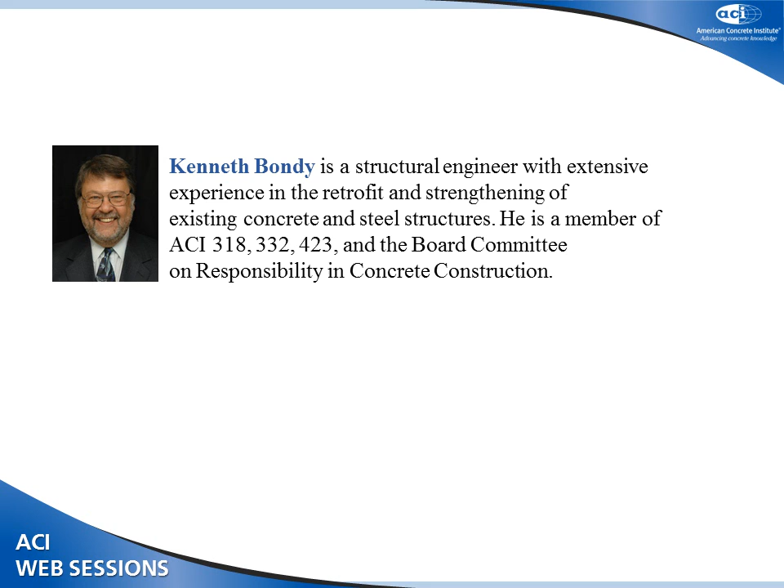Thank you, Pete. I think I deny some of that. But...

The use of externally applied post-tensioning tendons is a very powerful method for the strengthening and repair of existing structures. It's been used in all types of framing and all types of structural materials. It's been used to repair concrete buildings, structural steel buildings, and wood structures, a lot of wood structures. It's a unique method in that it increases the strength of the existing structure and it physically reduces deflection in the existing structure. In the 23 years that my design and construction companies, my Seneca companies, were active—

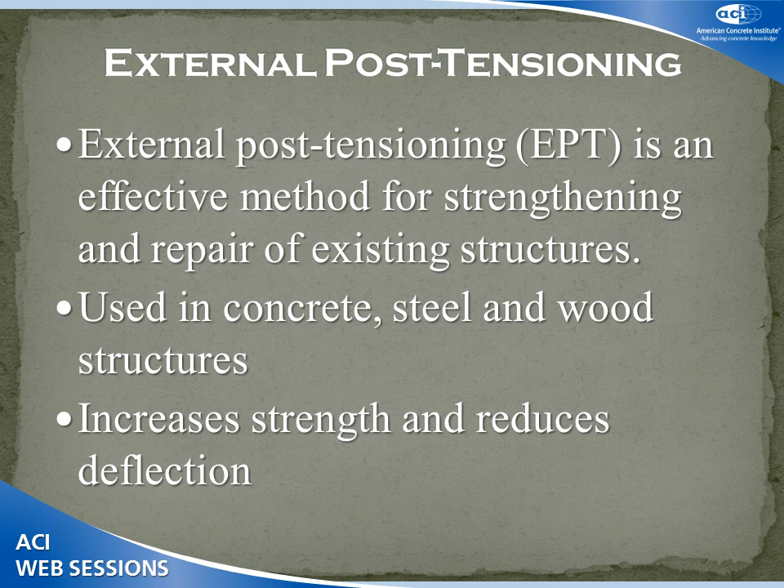That would be from the mid-1970s to the late 1990s, we developed a very unique expertise in the use of externally applied post-tensioning tendons to strengthen buildings. In that time period, we completed 110 repair projects using externally applied post-tensioning tendons. Our first repair project using external tendons was done in 1977, and it seemed like we were doing 3 or 4 a year from that point on until we wound down the business in the late 1990s.

A significant number of the buildings that we repaired had earthquake damage, so the technique has been used to repair many structures which have been damaged in earthquakes. Notably, after the Northridge earthquake, the big Northridge earthquake in 1994 in Southern California, in the subsequent 3 or 4 years, we used external tendons to remedy and retrofit more than 20 structures in Southern California.

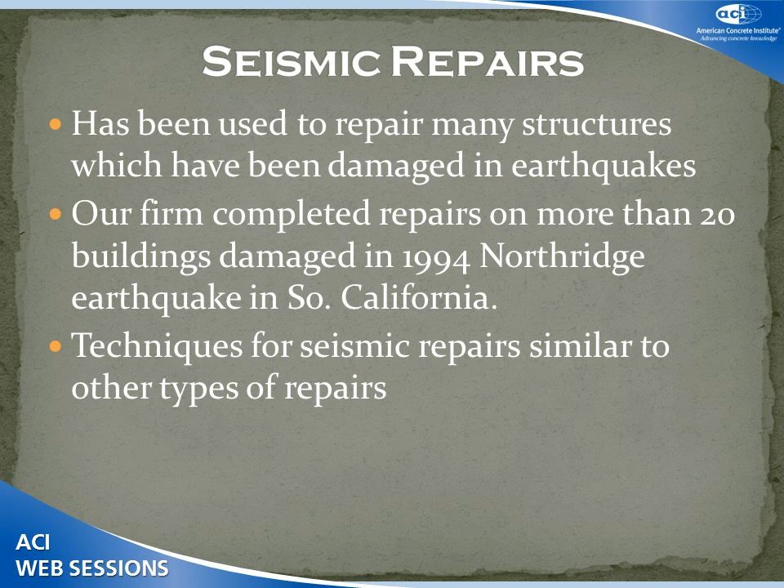The techniques for seismic repairs are very similar, if not identical, to gravity load repairs with external tendons. So basically everything that I'm going to be saying in this talk applies not only to seismic repairs but to gravity load repairs. The typical type of damage that we saw that was caused by earthquakes is this: it was punching shear. The Northridge earthquake had unusually large vertical accelerations, and it did produce damage like this in a large number of two-way slab buildings.

So when we were brought in on a building like this to provide retrofit services with external tendons, it's a little bit misleading to say repair because obviously there's a lot of concrete repair that needs to be done, but in most of these buildings it was found in the investigation that the punching shear capacity of the slabs did not satisfy the current code. So the use of external post-tensioning was used to increase the strength of the punching shear section. Every kip that we picked up and put in the column was one kip that did not have to be carried on the critical section.

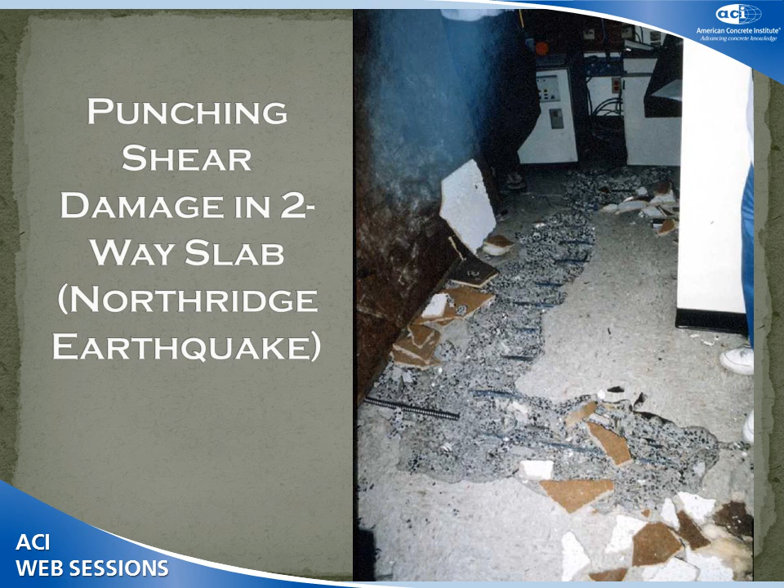The advantages of external post-tensioning for strengthening are many. Primarily, it's a technique that can apply a very large beneficial load at virtually any point in the structure with minimal headroom. It does that because it uses high-strength steel. The system is substantially weightless. It has no impact on existing columns, footings, or the seismic system. A huge advantage we found over the years is that it can be adjusted to avoid existing mechanical and plumbing systems, HVAC and mechanical systems, and it rarely, if ever, requires any changes to the existing systems, and building owners just loved that.

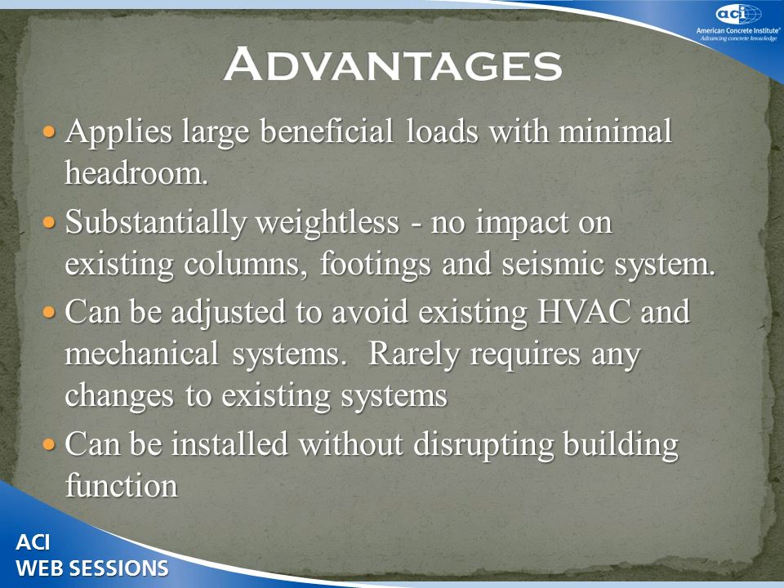Another advantage is that the system can be installed without disrupting the building function. You normally do not have to shut down a building to apply an external tendon retrofit. Occasionally we would have to block off one or two parking stalls, but only for a couple of hours. In a number of these buildings, we did our work at night and did not involve disruption of the existing facility.

The basics of a typical external post-tensioning retrofit can be described here. It's analogous to building a king post truss into the structure. The lower chord, the tension chord of the truss, is the stressed post-tensioning tendon. The king post is a structural steel assembly that applies the upward load. We used to call this a saddle. I noticed that it's called a deviator now, very commonly.

We used a structural steel tube that had a bearing plate which was bolted to the existing structure. We welded a double extra strong steel pipe to the bottom of the tube under which the tendons passed. We called that pipe a roller. It didn't roll - it was welded to the tube, but we did use that terminology, roller.

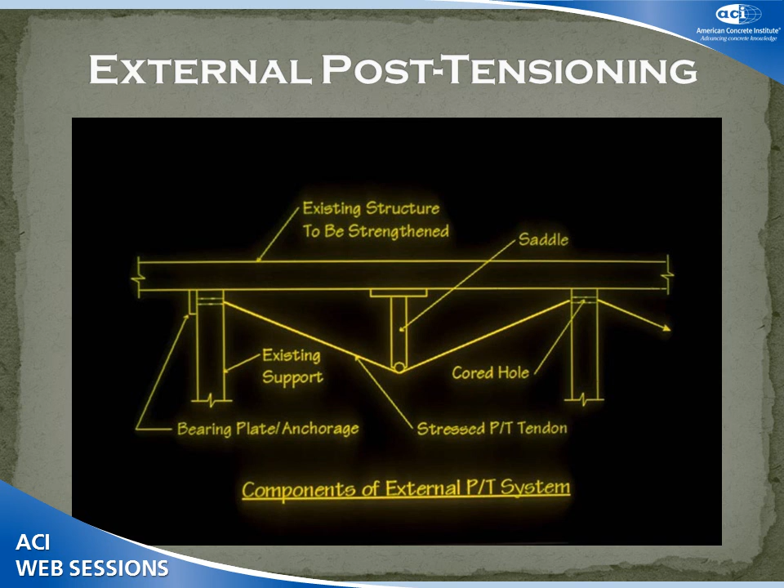The existing structure then becomes the compression chord, the upper chord of the truss. We would drill holes through the existing supports, either columns or walls, attach anchorages and bearing plates, and when everything was installed, we would stress the tendons. They would try to straighten out, but couldn't because of this big structural steel deviator, and when things came to equilibrium, we applied a very significant upward beneficial force to the structure.

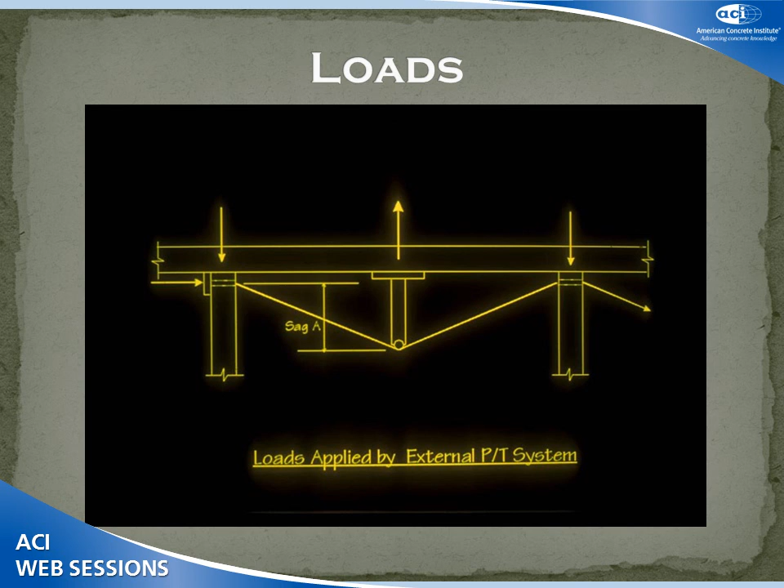The reactions to that upward load were carried directly into the existing supports and did not change any axial load in the structure. The efficacy of an external post-tensioning system is dependent on the amount of available sag that you have, which is a function of the headroom in the existing structure. The one thing that can eliminate or prohibit the use of an external tendon system is limited headroom.

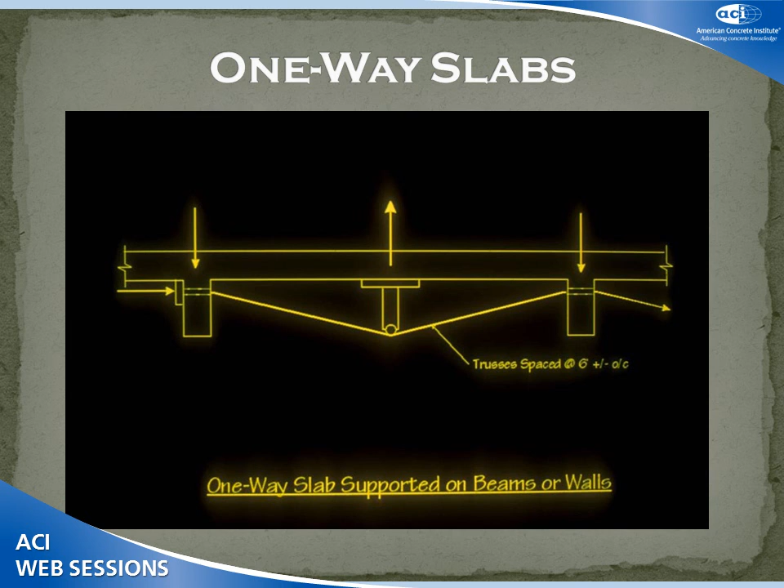We've strengthened all types of existing framing systems. That would include one-way slabs, where we drill holes through the existing beams and build a truss at some convenient spacing, like about 6 feet on center, into the slab.

We've strengthened beams and girders. That typically involves wrapping a structural steel kind of saddle assembly. Normally we didn't have a lot of headroom available below an existing beam, so we would solve that by wrapping a relatively thin plate around the soffit of the beam with structural steel tabs on the side, and we would weld our pipe, our roller, to that, which took the upward force from the tendons.

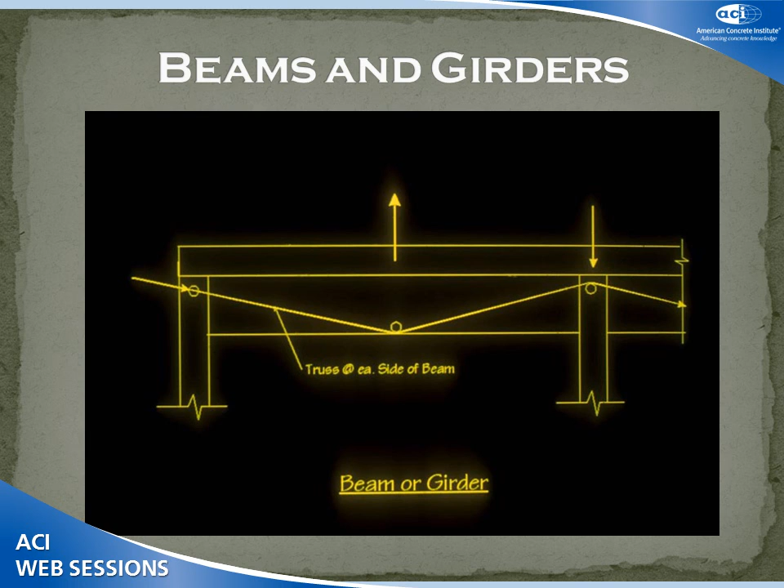At the existing supports, we would drill holes through the existing member, and typically we would insert a double extra strong pipe through that hole because we thought it gave better bearing when it was dry packed, and we applied the tendon force to those tubes or pipes.

Of all the 100-plus buildings that were repaired, I would say 75% of them were two-way slabs for one reason or another, either a strength deficiency or excessive deflection.

It's a little tricky because the most beneficial place to apply the upward load in a two-way slab, in plan, is right in the middle. You get the most bang for your dollar if you apply the load right in the middle. That relieves, for every kip of upward load, the most deflection and the most bending. It doesn't relieve the most shear, but most of our repairs, except for seismic repairs, were flexural repairs.

The most direct way to apply that load is to run the truss diagonally between two columns, dumping the load directly between two columns. But we found that was rarely possible for two reasons. Most of the columns we encountered were either square or rectangular, and that shape just doesn't work with drilling through. Plus, the orientation of the column bars virtually never allows a clear path through the column, and then there's the problem of bearing plates on the outside at that corner.

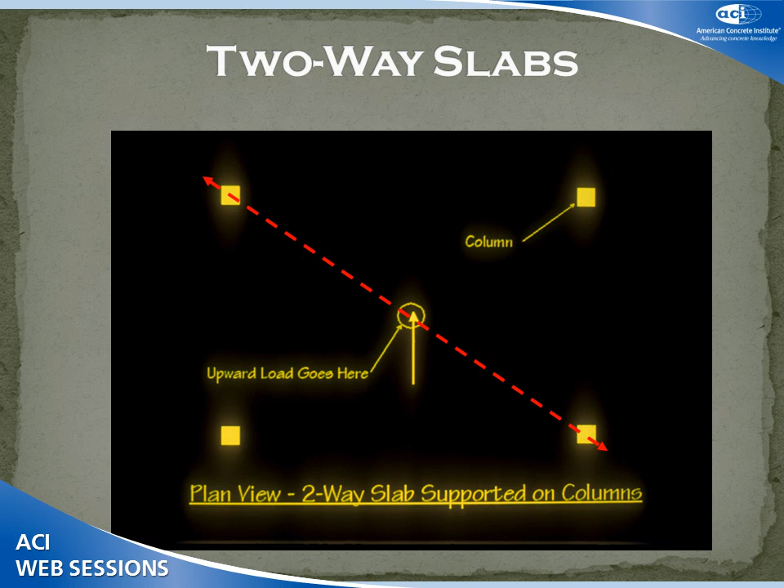So we developed a system for two-way slabs using orthogonal trusses, where we would apply the upward load at the center of the slab, using what we called a beam truss that ran parallel between columns, and it carried its load over to what we called a girder truss.

It dumped its load down. The beam truss was low here and high here. It would dump its load down onto another type of saddle that we called a B saddle, that had a roller at the top oriented to take the beam truss, and then another roller at the bottom that would take the girder truss, which would carry the load to the columns.

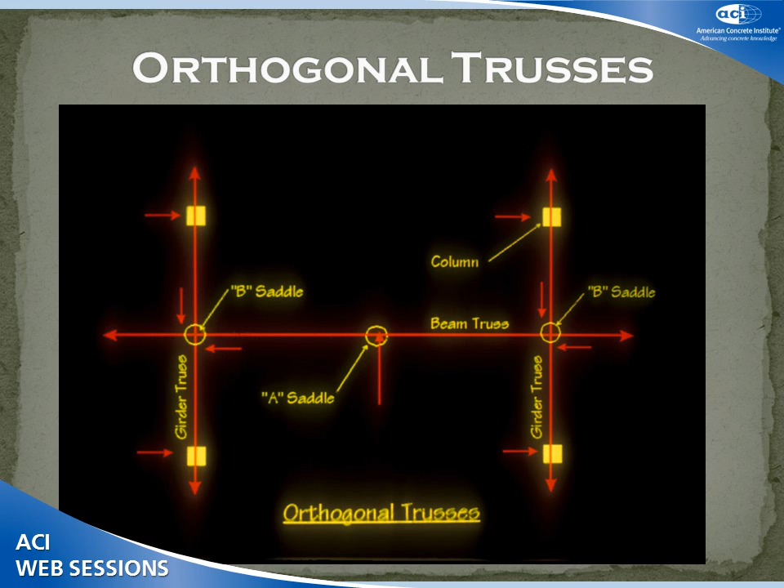We probably did 70 or 80 buildings with this method of orthogonal trusses. Here's what one of those orthogonal truss systems looks like in a building that we did repair. This photo was taken after the fireproofing was applied, and I'll talk about fireproofing in a minute. But this is the A saddle.

This is where the upward load is applied to the center of the panel, and this is the beam truss, and it carries its load over to the girder line where it dumps its load down on what we called the B saddle that had a roller at the bottom that could accommodate the girder truss, which carried the load over to the columns. It was a little tricky. You had to be very careful that the upward load was bigger than the downward load, or some very strange things would happen, and did happen occasionally. But that's what the orthogonal truss system looked like.

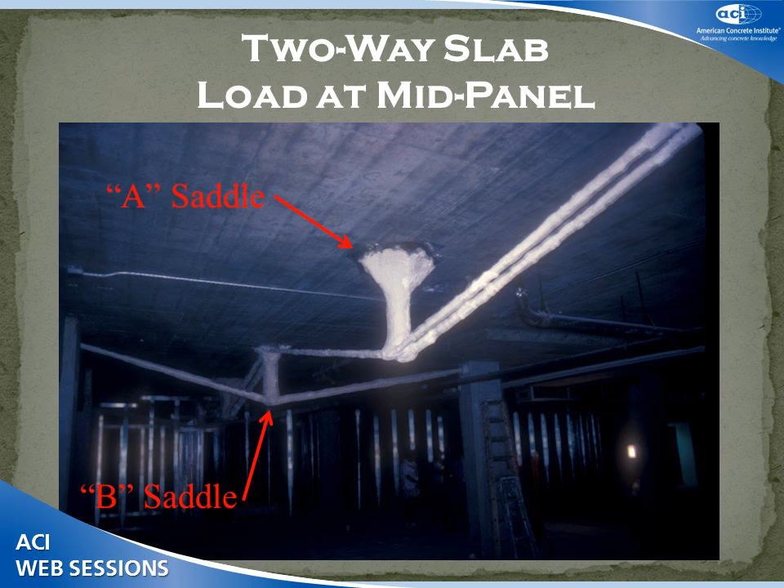This is in an office building that we did in the late 1980s. It will eventually receive a suspended ceiling. This is the only one of our 100-plus buildings that we repaired using external tendons that did not apply an upward load on the structure. The beneficial load in this building was applied horizontally.

It's an interesting building, a landmark building in Southern California. It's the Orange County Hall of Administration, the center of government for a very large county, Orange County in Southern California. It contains many of the county offices, and it contains the meeting hall for the Board of Supervisors, where all the important laws are made in Orange County. Obviously from the architecture, it's a very, very focal and public building.

You notice that the columns slope outward. All of the exterior columns slope outward to allow the floors to get bigger as you go up the building. In perhaps the most amazing engineering mistake I have ever seen in my career, the horizontal tension load that is required in the floor system to prevent the columns from rotating outward was ignored in the design of this building. The columns were designed for eccentricity of the vertical load, but the horizontal load that prevents the columns from rotating never appeared in the calculations anywhere.

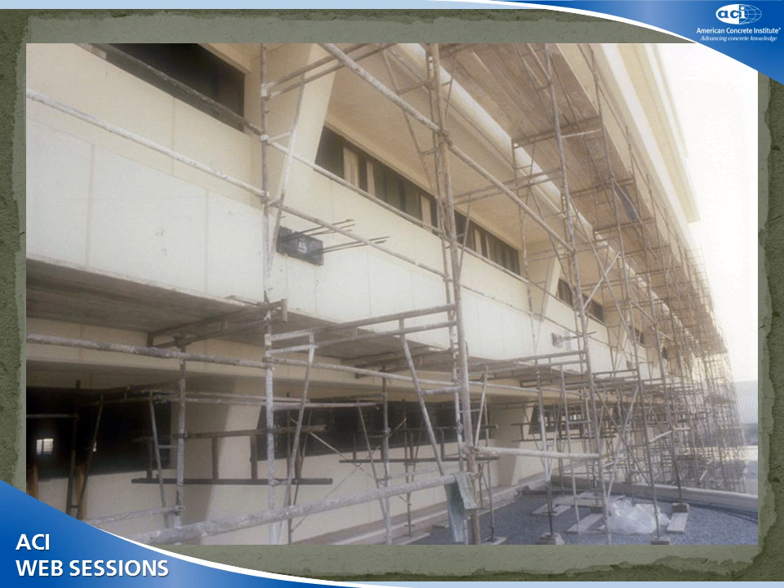The project was very successful and was completed on time. As I recall, there were 6 strands, and we needed about 150 kips of force at each column. In this project, we did that with a very thick steel bearing plate on the exterior of each column location, and we had tapered holes milled into the bearing plate so we didn't need any anchorage portion extending out from the face. Eventually these were covered with little architectural blobs of concrete.

Many of our projects required fireproofing — those where the external tendon system provided a substantial portion of the capacity of the existing structure. Over the years we tried various types of fireproofing: spray-on like they do in structural steel, and encasing the tendons in drywall. But we never came up with anything more effective than using a self-furring metal lath wrapped around the tendons and structural steel hardware, with a hand-applied vermiculite plaster. It's kind of primitive, but over all 23 years we've done this work, we never found anything better.

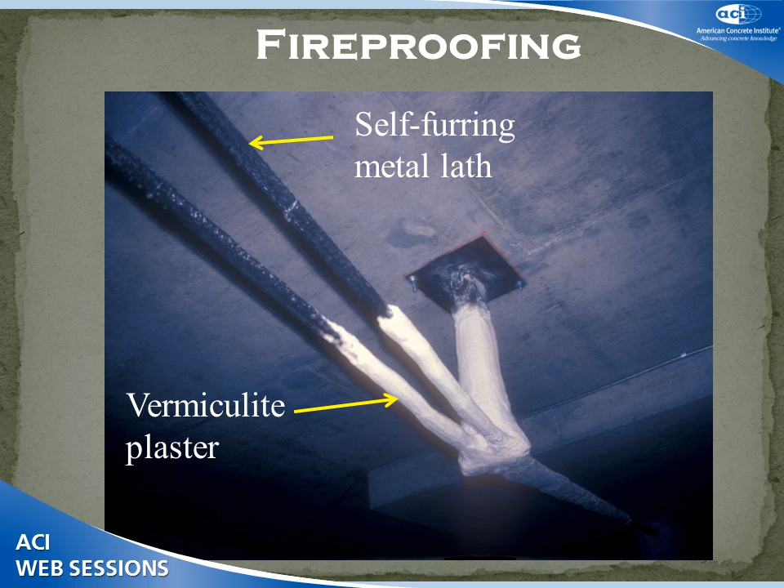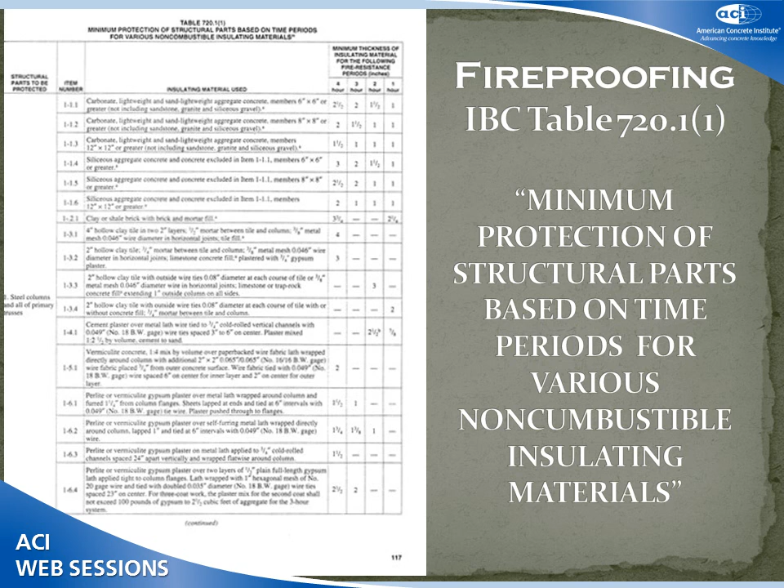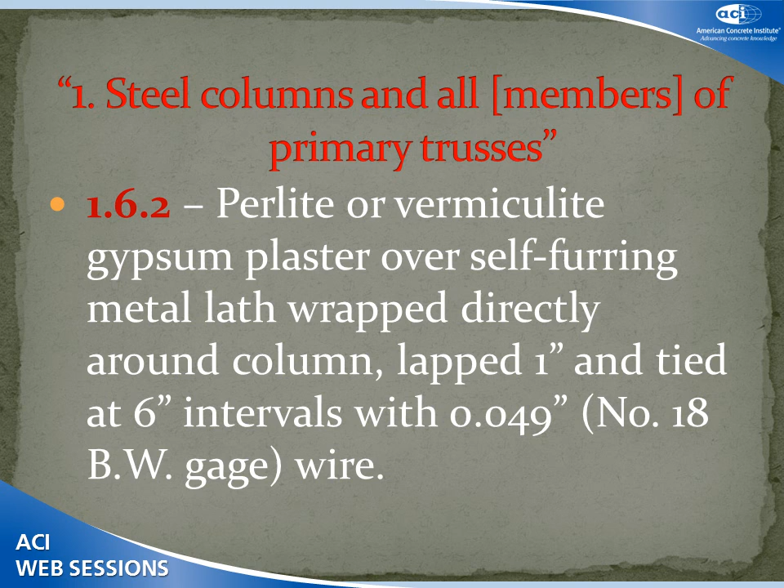We justified it with fireproofing protection tables that have been in the Uniform Building Code for decades and now appear in the International Building Code, Table 720.1(1). The specific section we use is 1.6.2, where we're told that to protect steel columns and all members of primary trusses, you can apply a perlite or vermiculite gypsum plaster over self-furring metal lath wrapped directly around the column. This was actually suggested to us by a building official in Los Angeles, and we've used it on many of our projects. The code requires a certain thickness of cover for each fire rating.

For 2 hours it requires 1 inch, for 3 hours 1 3/8 inches, for 4 hours 1 3/4 inches. We would typically specify 2 inches of cover to get the equivalent of a 5-hour rating, partly for conservatism, but partly to address the occasional question from a building official about the fact that this table is for structural steel, and the steel you're protecting here is high-strength pre-stressing steel. We were always able to satisfy that concern with the fact that we were providing much more than the upper 4-hour rating in the table.

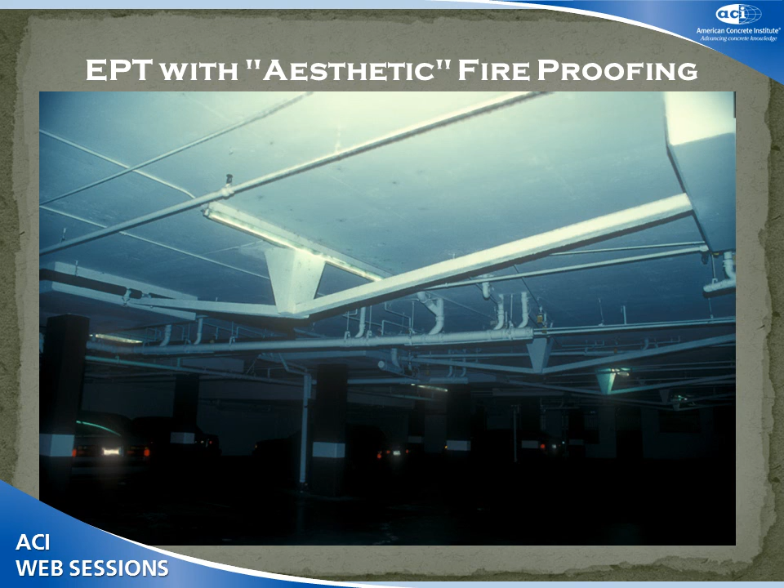One nice thing about using plaster for the fireproofing — in most of our buildings the tendon system was not visible, it was above a suspended ceiling or hidden. In other cases, the owner just didn't care that it wasn't as attractive as the plumbing and other stuff the tendons were mingled with. But in certain cases like this one, the owner was concerned with aesthetics. I don't quite know why, given these pipes and plumbing, but the owner wanted a kind of aesthetic appearance, so we were able to shape the plaster and get a nice rhombus shape on the saddle.

This is an earthquake repair, by the way. This building suffered extreme punching shear distress in the earthquake, and it also didn't satisfy the code as designed. We were able to remedy that by applying these upward loads not at the middle of the panel, but right on the column line, to maximize the amount of shear we were relieving.

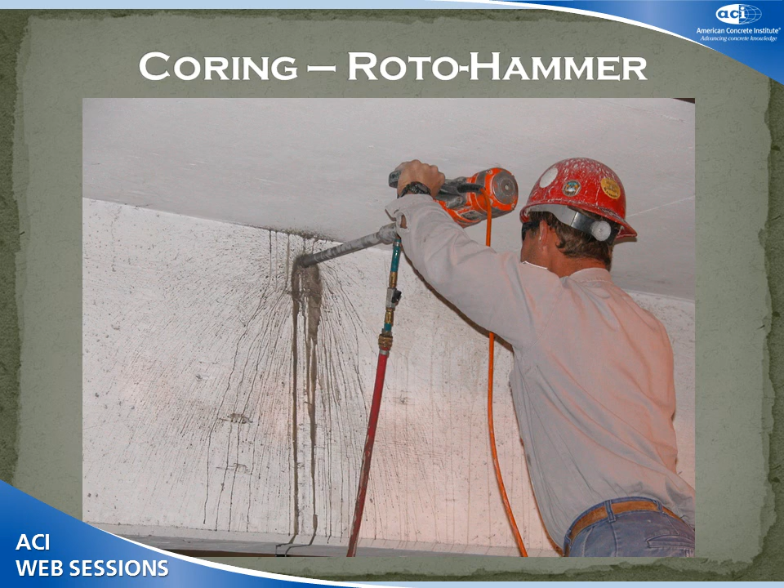If you only need 1 or 2 strands — and by the way, all our work was done with single strand, half-inch diameter, 270 KSI strand that was greased and wrapped, a typical unbonded tendon. Whether it was fire protected or not, we always used individual greased and wrapped half-inch diameter strands. If we only needed to pass 1 or 2 through a hole, you could do that with a roto-hammer. But in most cases where we needed 2, 3, or 4-inch diameter holes, we had to use regular core drilling equipment with diamond bits. The tendons were stressed with conventional stressing equipment.

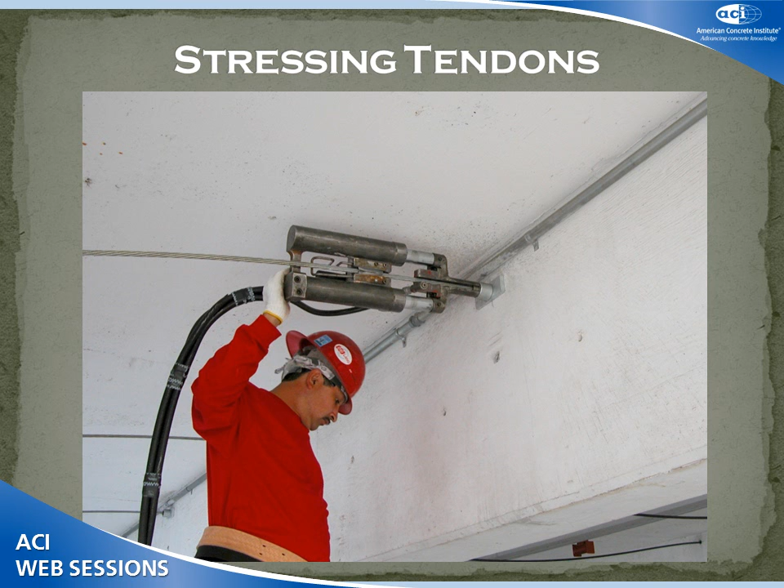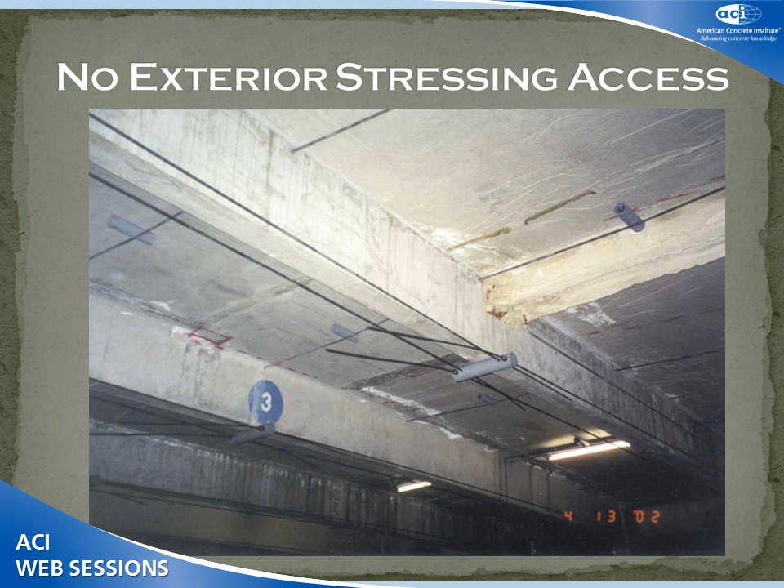In many of the buildings we repaired, we had no access to the outside of the building, so we had no way to stress the tendons from the exterior. We developed methods for interior stressing, internal stressing. The typical one we used was a double extra strong steel pipe where we overlapped the strand at the center of the structure and stressed each strand in each direction. It involved careful coordination of equalizing the forces on both sides, but it was an effective method for stressing all tendons from inside the structure.

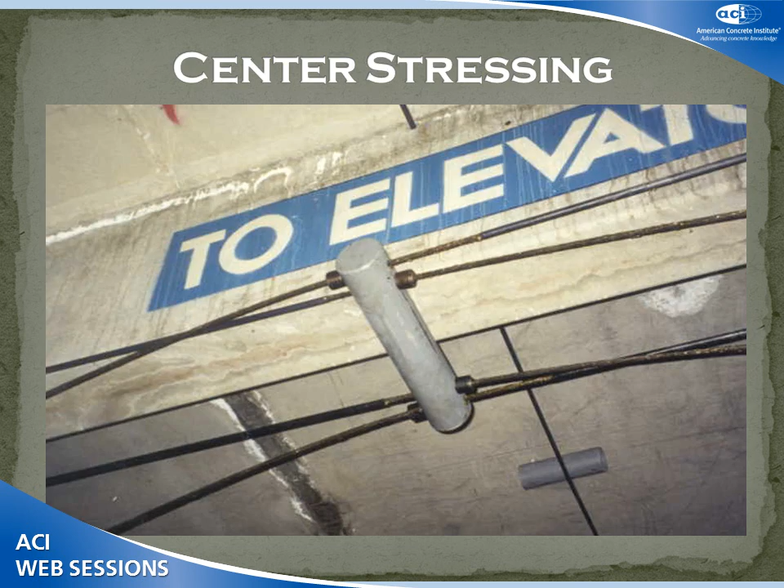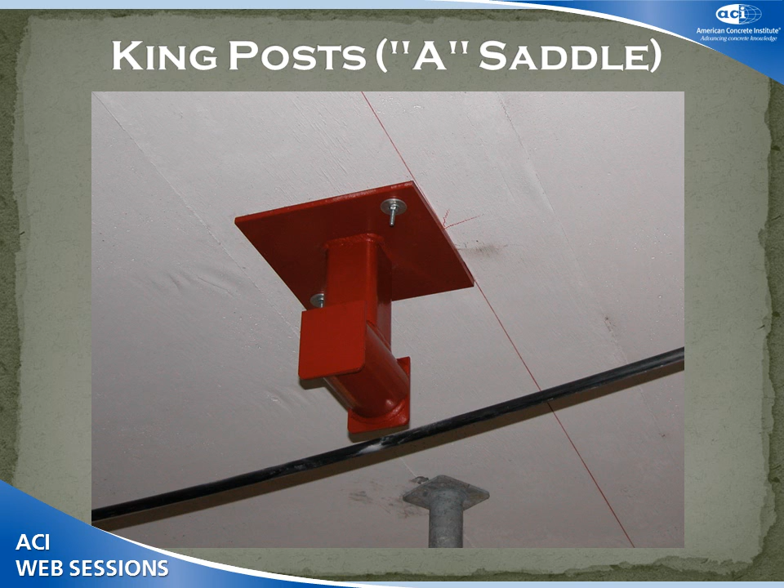This is a tight view of one of our A saddles, a short one used in a one-way slab repair. It has a bearing plate which temporarily bolts to the slab to hold the weight of the assembly, typically a 4-inch square structural steel tube. It has a double extra strong pipe we called the roller, and we always welded a tab on both sides to prevent the strand from accidentally rolling off the roller.

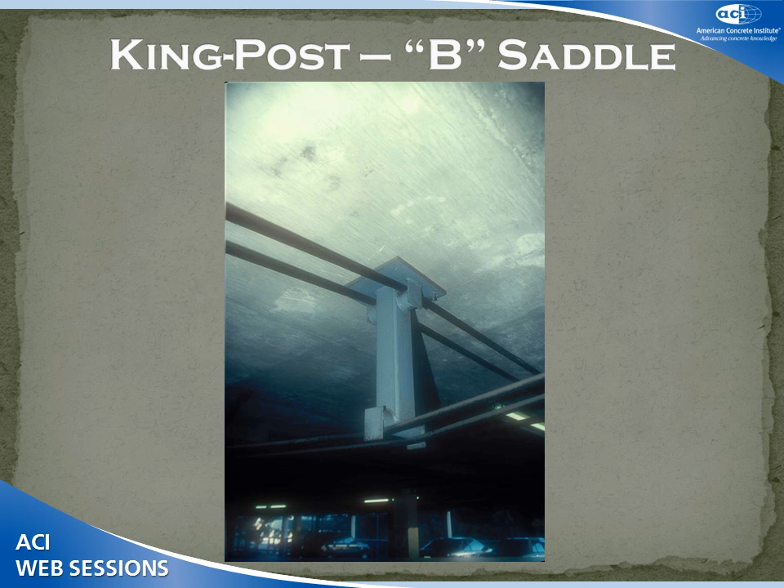This is the B saddle, where the downward reaction from the beam truss is applied at the top of the girder, and the girder truss, which carries the load to the columns, is at the bottom under a roller.

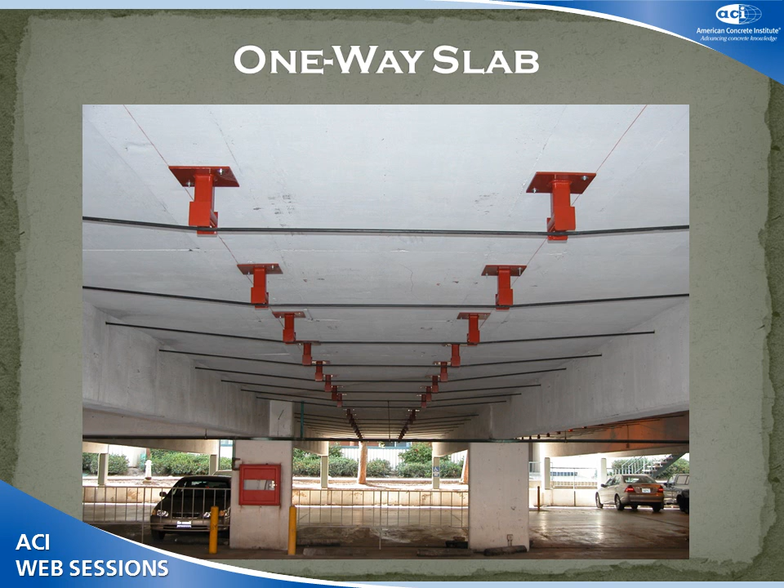Here's one of the oldest jobs. This has been in place for almost 30 years now. This is at the Anaheim Hilton in Anaheim, California, directly across the street from Disneyland. So if you're visiting Disneyland, you should stop by and see this. It's still there. It was not fireproof, it was a deflection control. There was terrible deflection in these slabs, and we picked up some of these slabs up to 4 inches with this system.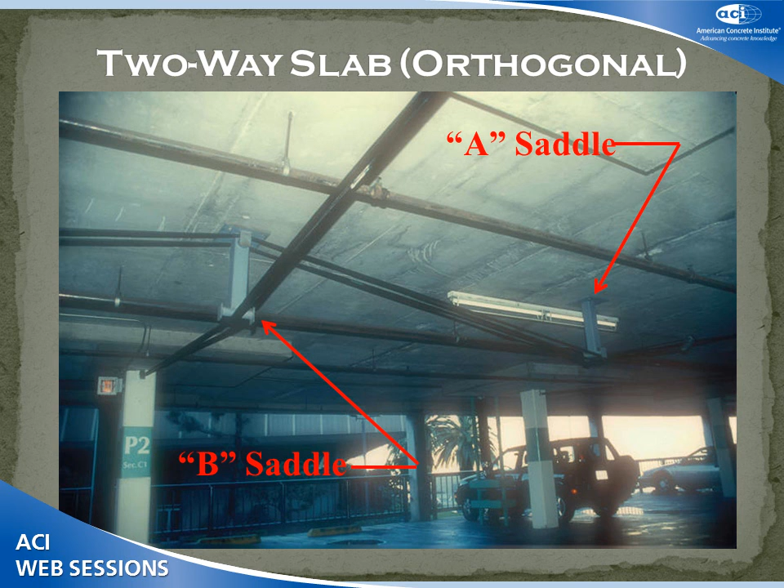It's a two-way orthogonal repair. This is the A saddle right in the middle of the bay, which carries its load over to the B saddle here, which carries its load to the columns. So again, that's one of our oldest repairs.

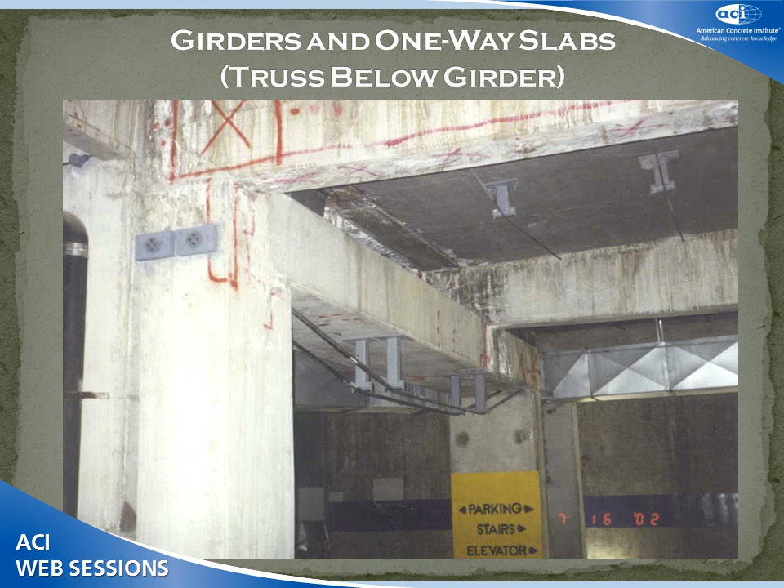It's kind of an unusual one here. This was a girder that we were asked to strengthen. We had plenty of headroom below the girder and access to each end of the tendon, so we were able to drill the holes directly through the end of the tendon at an angle and build the king post trusses under the girder instead of alongside the girder. So anything's possible. We also did, as you can see, a slab repair or strengthening.

To summarize, the use of externally applied post-tensioning is a very powerful method for strengthening existing buildings. It has been used to remedy design errors where it increases the flexure and shear strength. It has been used for occupancy changes where nothing is wrong with the building, but there's an occupancy change requiring increased live load. We've increased the live load on a number of buildings from 50 to 100 pounds per square foot. It's also been used to remedy damage in existing buildings due to corrosion and seismic damage.

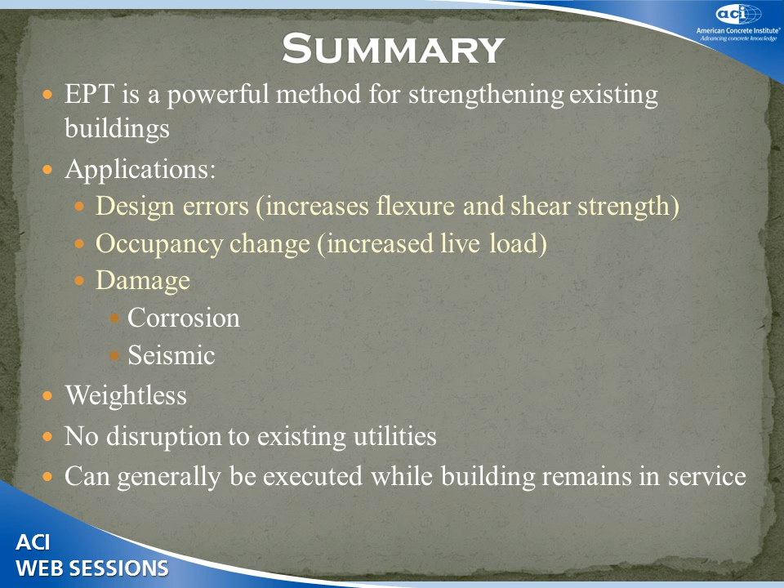Again, it's weightless. It involves no disruption to existing utilities, and it can generally be executed while the building remains in service. There's one other, probably the most important advantage I haven't listed, and that is that it's very economical. In many of these projects, we've competed on a design-build basis with all other types of repair systems, and we have never lost one of those design-build competitions.